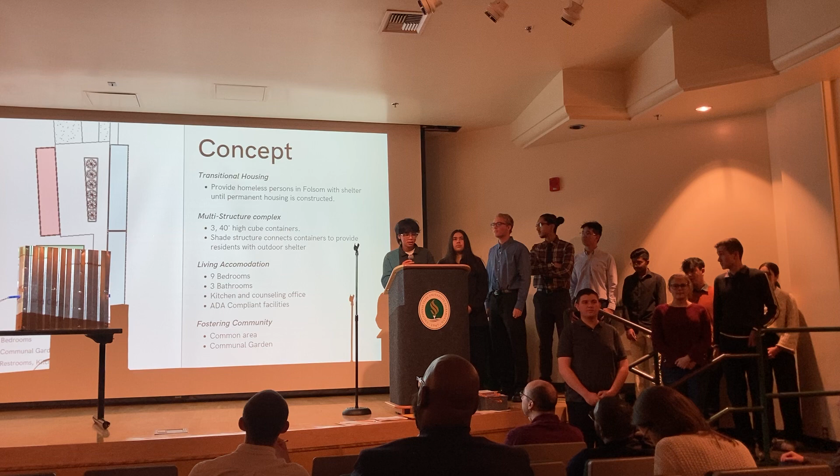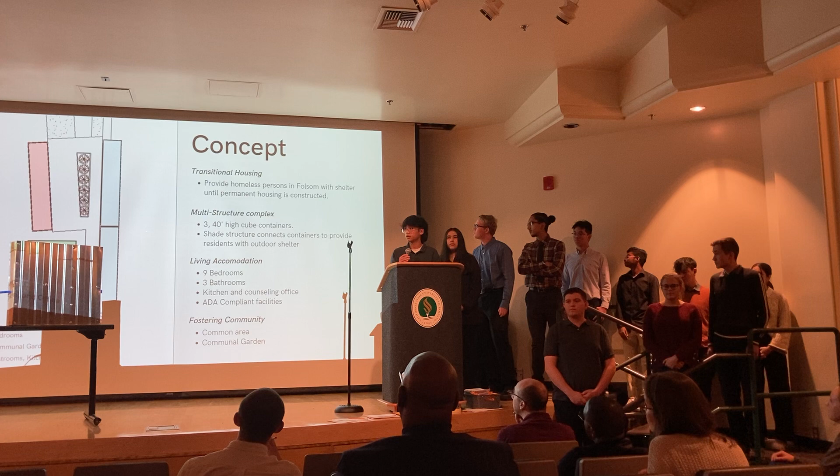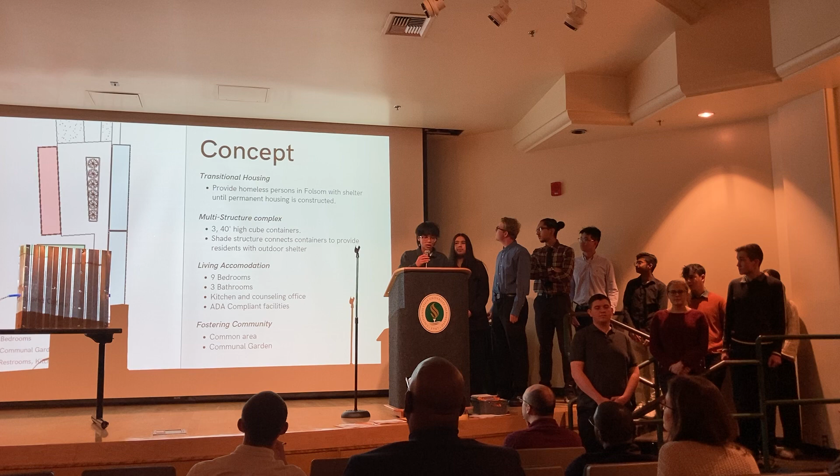Looking at our complex layout, you can see that it is comprised of many different structures. Our complex includes 3 40-foot high-cube containers, all connected with an extensive shade structure. This shade structure provides shelter from the outdoor elements and provides ease of access between different spaces. Our complex includes 9 bedrooms, 3 bathrooms, 1 kitchen, and 1 counseling office. 1 bedroom and 1 bathroom are currently ADA compliant.

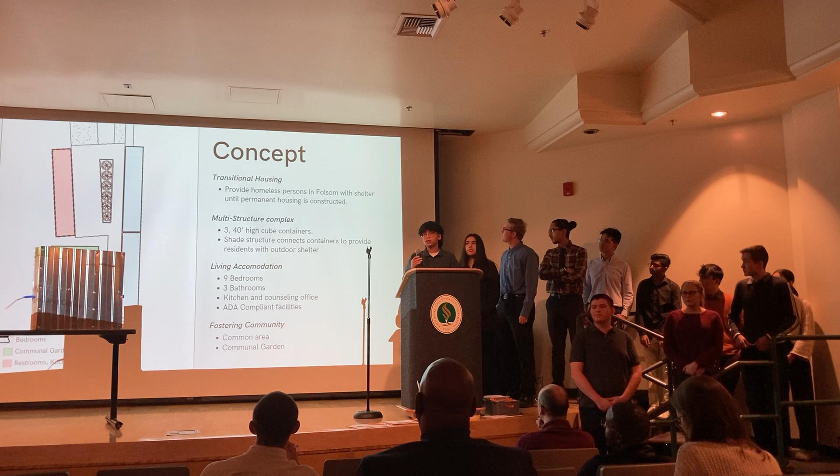To help foster a sense of community among our members, we designed our complex to include a common area located next to the kitchen, and a communal garden towards the southwest of the project. This allows residents to interact with one another and form close relationships.

Completing this project took a lot of research. In just a moment, you'll hear from Annalisa about the points we have discovered.

The city of Folsom does not directly offer services to homeless. People seeking these services are referred to centers located in Sacramento. The nearby CalCerts Center provides training for trades in the built environment, which residents can utilize to begin a career. Our location is an empty plot of land near the Folsom Kikkoman factory.

Why did we choose a transitional housing complex? Well, for one, here at Folsom High, we believe that everyone should have some sort of access to shelter. This transitional housing complex will provide shelter to those who can't afford to buy a house or rent an apartment or do any of the traditional shelter things that we believe people should have access to. It also provides homeless persons access to an opportunity for a better life.

As Annalisa stated, the CalCerts Training Center right next door offers career training in technical fields, and our on-site counselor's office provides career guidance to allow our tenants to have a foot in the door of the working environment. It also provides safe housing and clean amenities, such as clean and safe bedrooms, sanitary bathrooms, and a kitchen to provide safe and healthy meals, which is a lot better than what they have access to just living on the streets or in our parks.

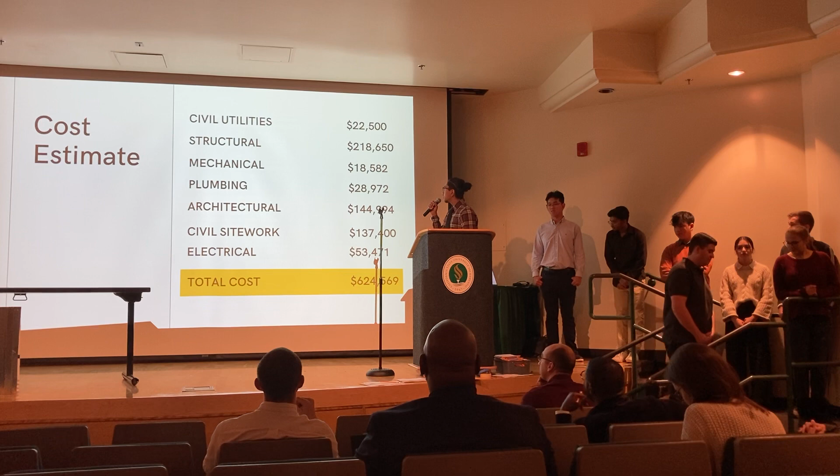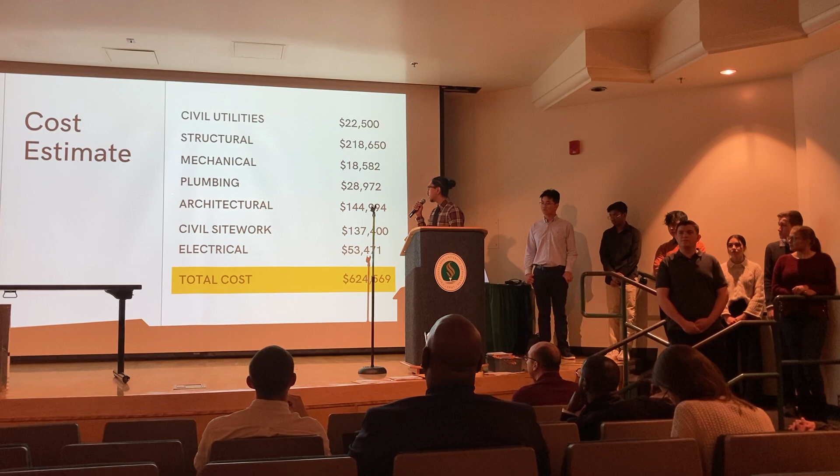Obviously whenever we build something or design something, there's going to be cost involved. Here we have come up with our cost estimate, and we have our subcategories listed here with their individual costs. Our total cost is going to come out to be $624,569. The way we came up with this cost was our creative team came up with a spreadsheet to calculate these, and we put in quantities of different things that we included in our design. With that, we came out to our grand totals and our subtotals.

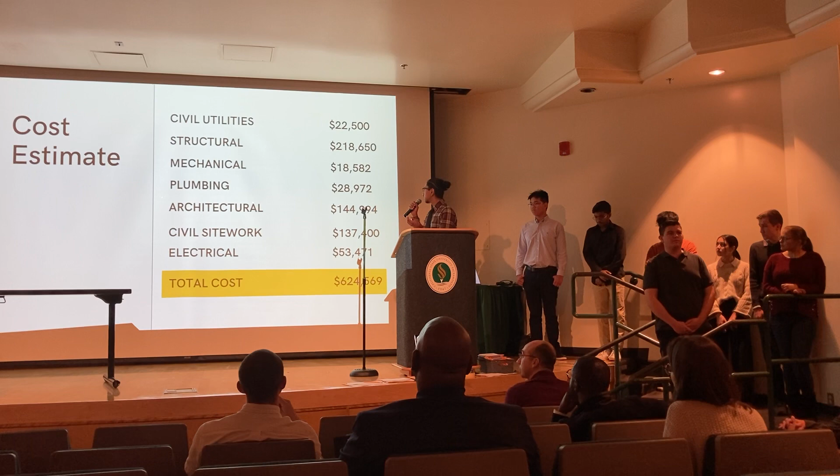We have also visualized our design through some renderings, and we're going to have Jason here elaborate on that in a bit.

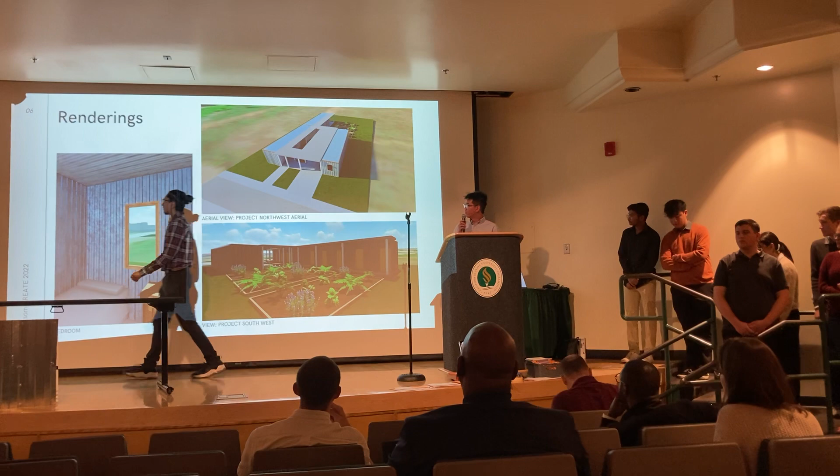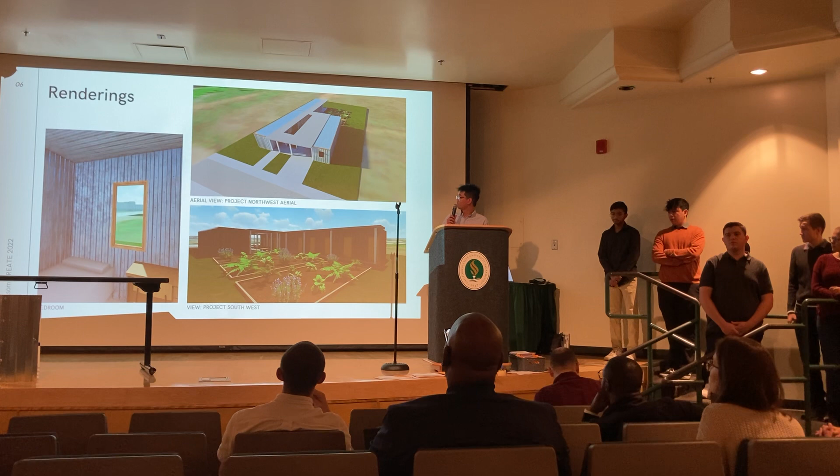As you can see by the renderings, for that left image, it's going to be the bedrooms. And then these two right images are going to be the aerial views. The top image will be the northwest aerial view, and the bottom will be the southwest. And then to show the more communal gathering areas, we're going to get some views.

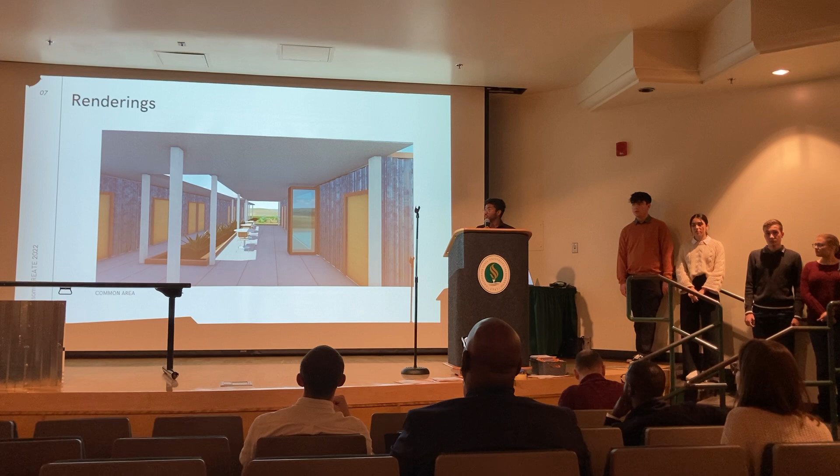So this image shows a view of our common area. The common area is an open area and it provides residents a chance to gather around and have different social activities. The common area also provides residents with an open kitchen, and that kitchen is that red container.

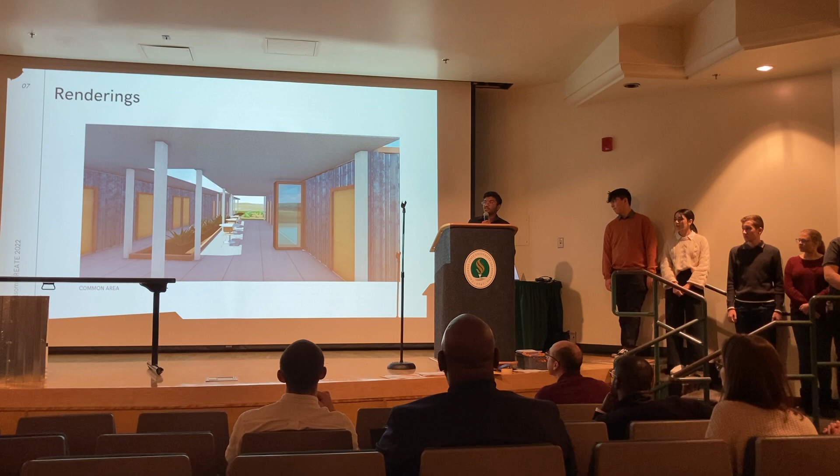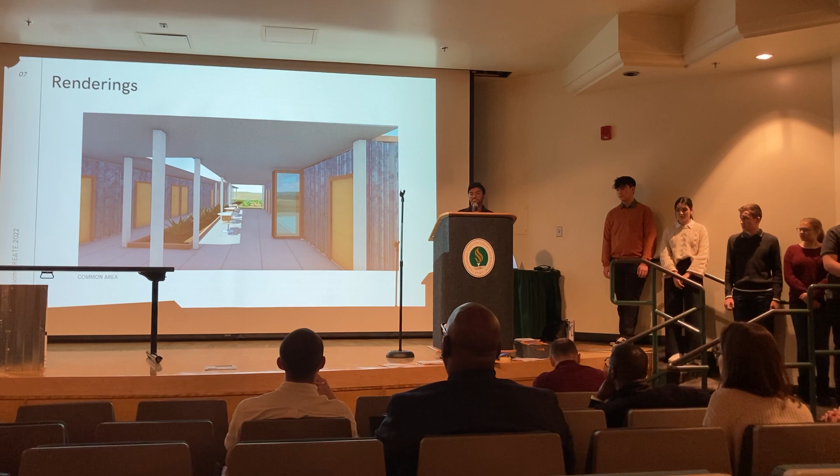As you can see, there is an open shade structure, and that allows for natural sunlight to light up the common area. And as we're talking about sunlight, this natural sunlight goes with our electrical, and that goes to our engineering component.

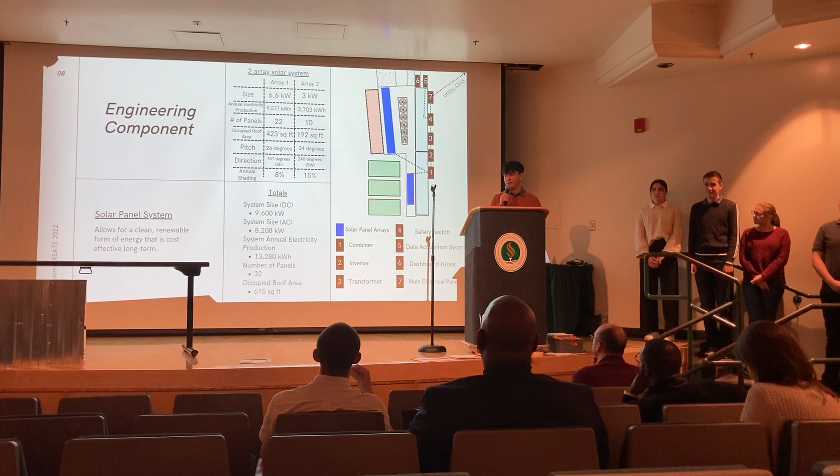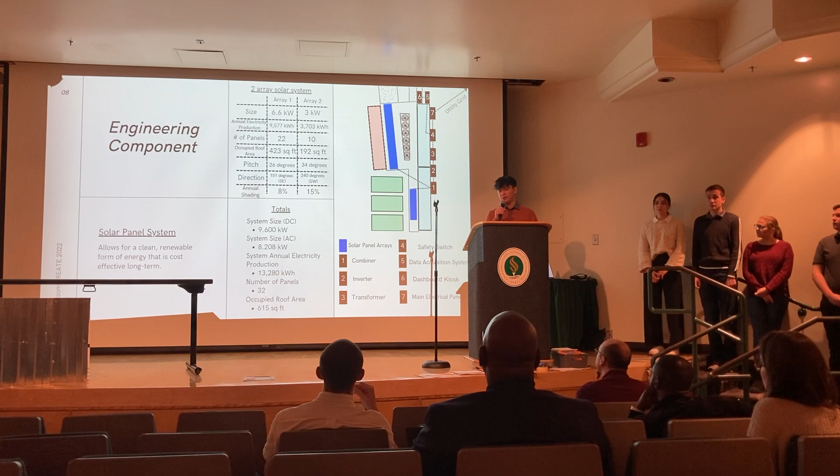The system will be split into 2 different arrays for a total of 32 solar panels. It'll cover a total of 615 square feet and give 13,280 kilowatt hours of power. This is only a small part of our total structure. So to show you what other parts may look like, we'd like to present our case.

For our trade component, we decided to construct a small wall section of our structure. First we attached wooden wall studs to the exterior metal of the shipping container. Our Create mentor instructed us that in real life, we'd probably use construction adhesive to keep the outside metal from being punctured through and therefore not waterproof.

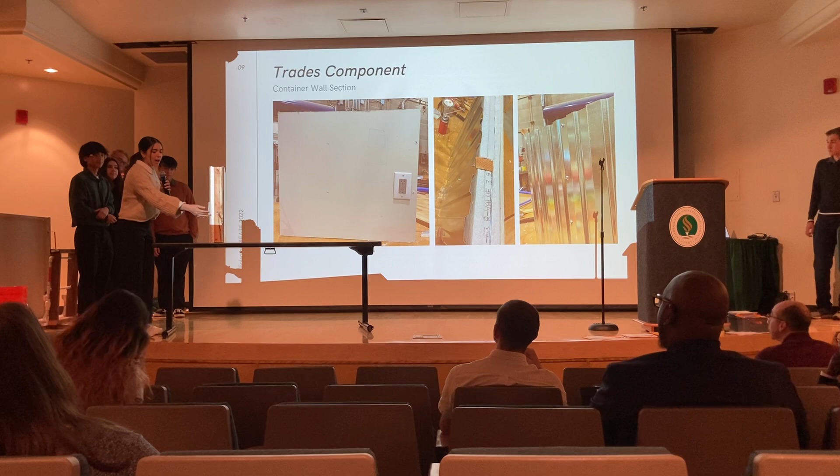On the other side here, we also decided to demonstrate what an electrical outlet would look like in our wall section. So we would have our Romex going through electrical metal tubing to prevent it from being broken through should anyone decide to screw into the wall or nail into the wall. That Romex would run through to all of the outlets and switches in our structure.

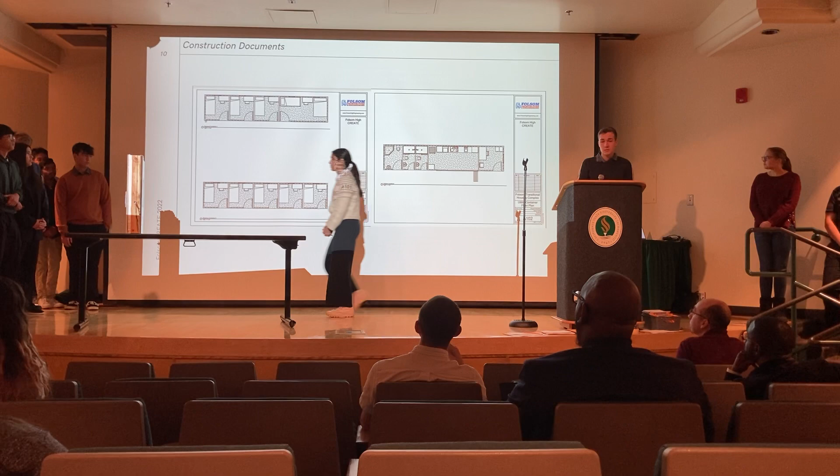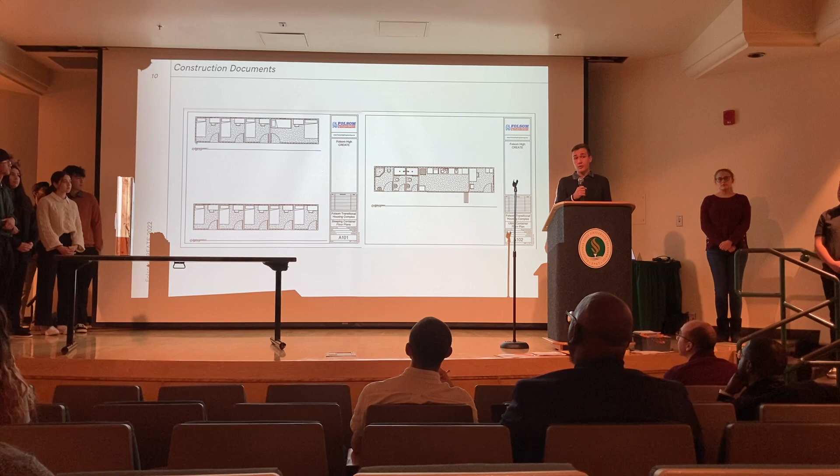The sheet on the left displays our floor plan for the 2 sleeping containers. The larger bedroom pictured in the top right functions as both our family and ADA compliant unit. Each smaller bedroom is approximately 7 by 7.5 feet in size.

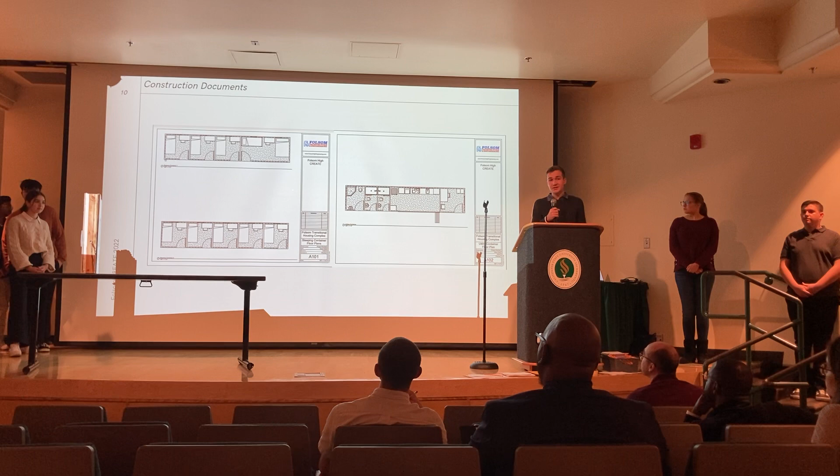The sheet on the right displays our floor plan for the communal container. This communal container on the left has 3 bathrooms, the leftmost one being ADA compliant. In the center, there is a kitchen, which is lined with accordion glass doors, which can be opened into a common area to create an open air environment.

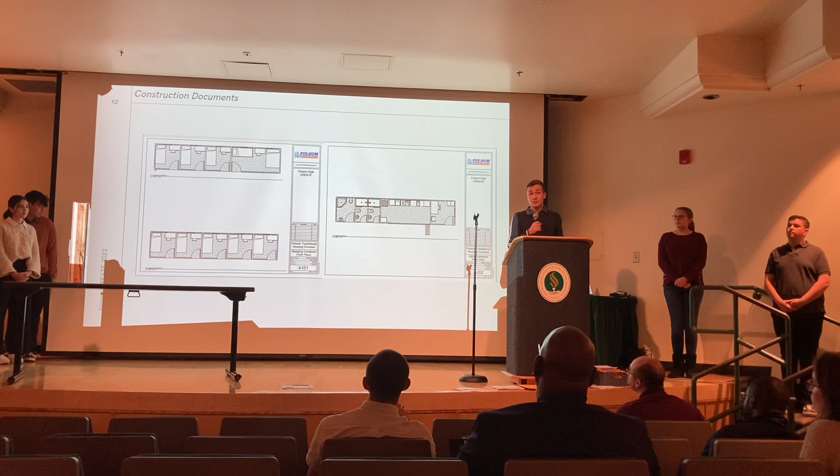On the right of the communal container is an office which can be used by the residents to consult the higher-ups. The next slide will help you visualize the arrangements of the containers.

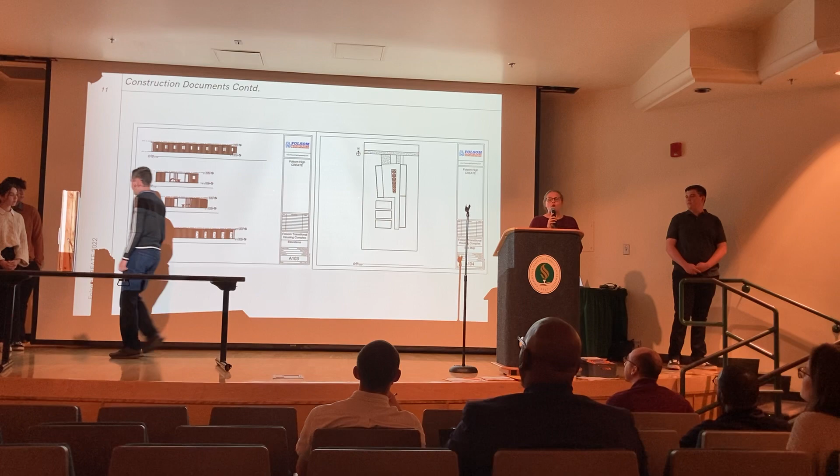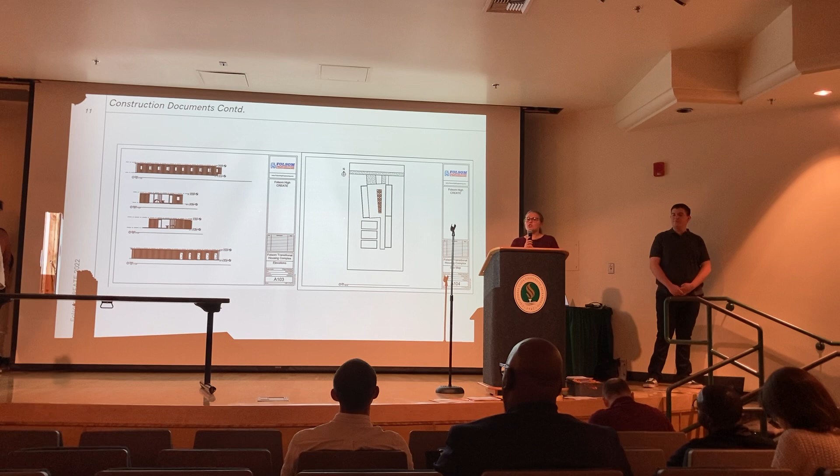On the left-hand side, we have our elevation views, and on the right-hand side, we have our site layout. Our site is about 70 by 100 feet, and as you can see by our layout, our communal areas are separated from bedrooms.

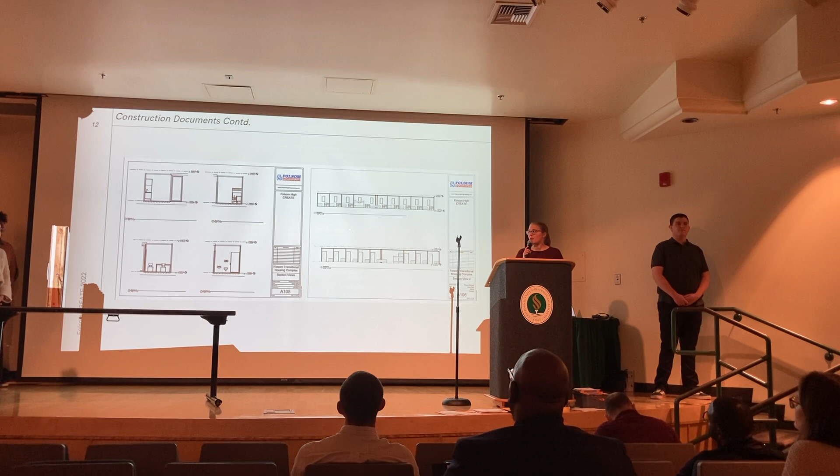This slide shows our individual sections. On the left-hand side is our individual sections of each of the rooms that we have. The upper left hand is the kitchen, the upper right is a bedroom, the lower left is the counselor's office, and the lower right is one of the bathrooms. On the right hand side, we have our overall section view. Our ceilings are about 9 feet high.

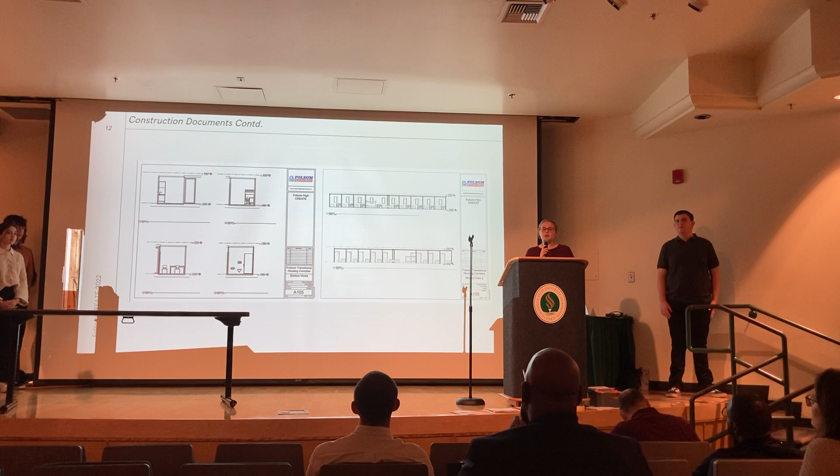So in order to build this complex, we need to raise funds, and Ben will explain how we will do that. To conclude our presentation, I'd like to introduce our public service announcement video to help fund our project.